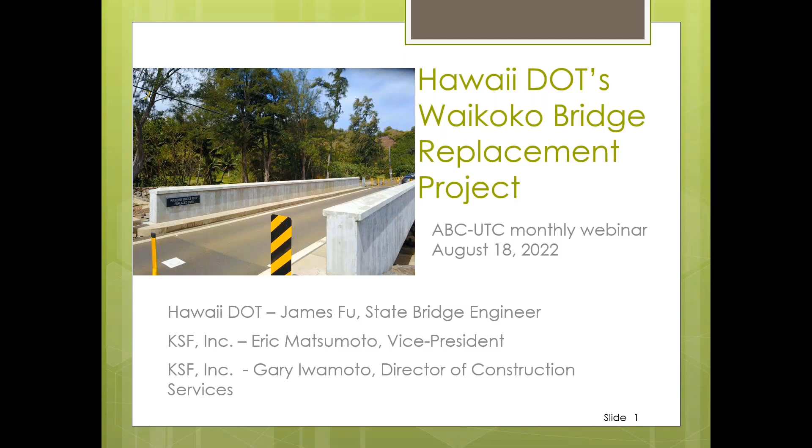Hawaii currently has about 1,360 bridges in the state. The average age of our bridges is nearly 70 years old. Our Bridge Design Office manages many programs, such as the Bridge Seismic Retrofit Program, and the Bridge Load Rating Program, where we must meet a federal mandate to load rate all of our bridges for SHVs by December 31st, 2022. We also manage a bridge crash testing program, where we are crash testing our custom Hawaii bridge rails per MASH 2016. We're also replacing many of our destination sign support structures. One of our main tasks is managing our bridge asset management program, where we must meet transportation asset management goals of 20% good bridges and 2% poor bridges. One of our critical tasks is to address critical bridge findings.

Hawaii has a unique situation compared to other states because our highways wrap around the island like this, usually called a belt road system. In most cases, because of this belt road system, if a highway is closed for some reason, residents must use an alternate route, and most times they need to drive great distances to reach their destination.

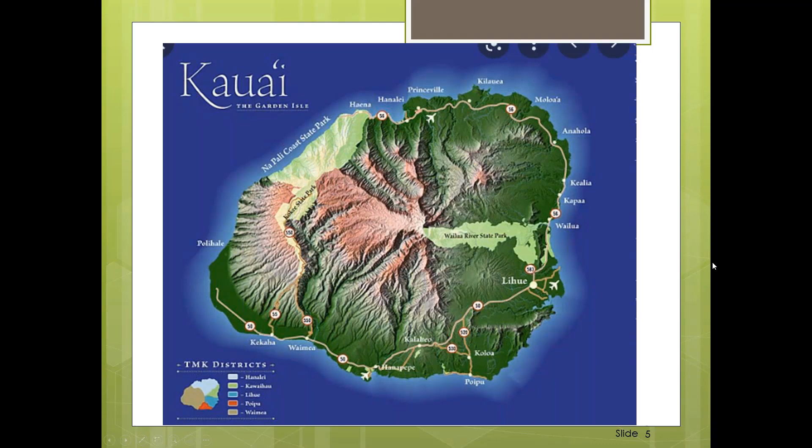Back in April 2018, there was a huge rainstorm on the north shore of Kauai. Heavy rains occurred between April 14th and 16th of 2018, which set a national record of 49.69 inches of rain in a 24-hour period. The previous Hawaii record was 38 inches. These heavy rains created many landslides on the north shore of Kauai, which closed the highway.

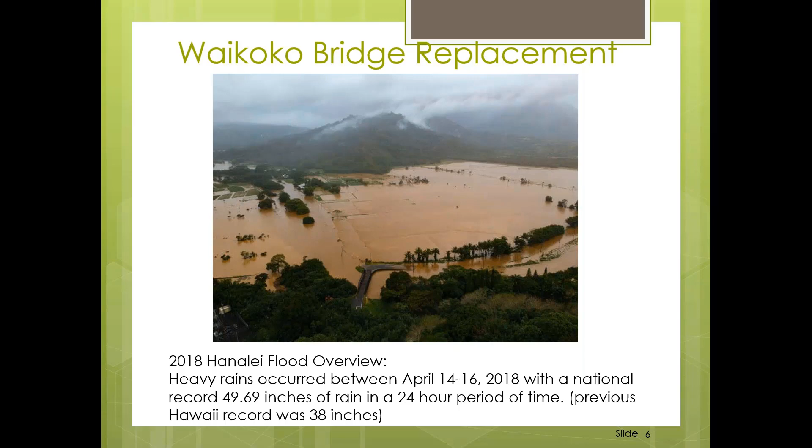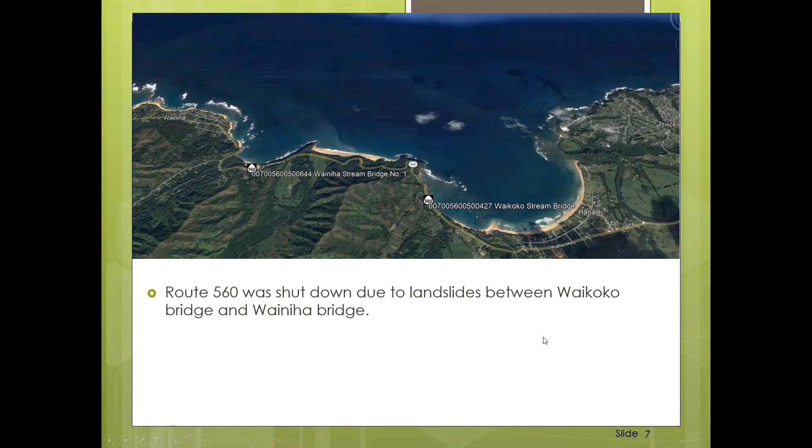Route 560 along here was shut down due to landslides between Waikoko and Wainiha. See Wainiha here.

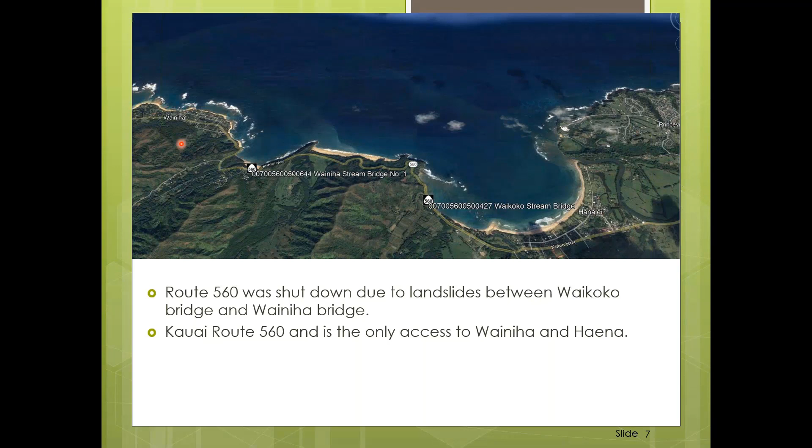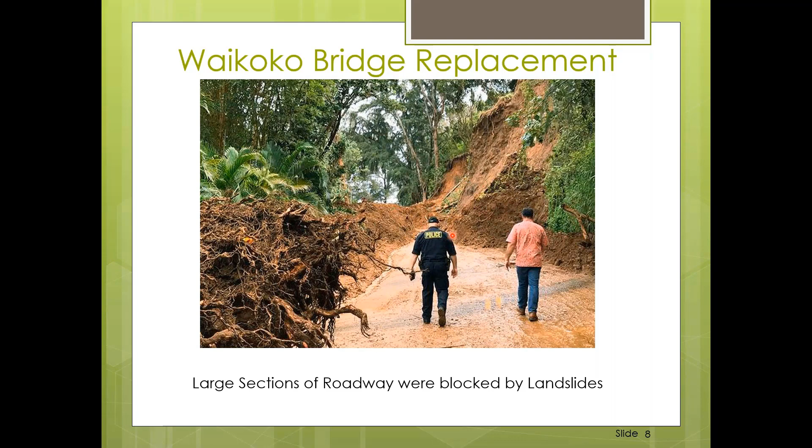As I mentioned before, to get into this area, Route 560 is the only access to Wainiha and Haena. Traffic was slowly opened to one-lane traffic after a few weeks. Large sections of the roadway were blocked by multiple landslides, and large sections of Route 560 were literally washed away.

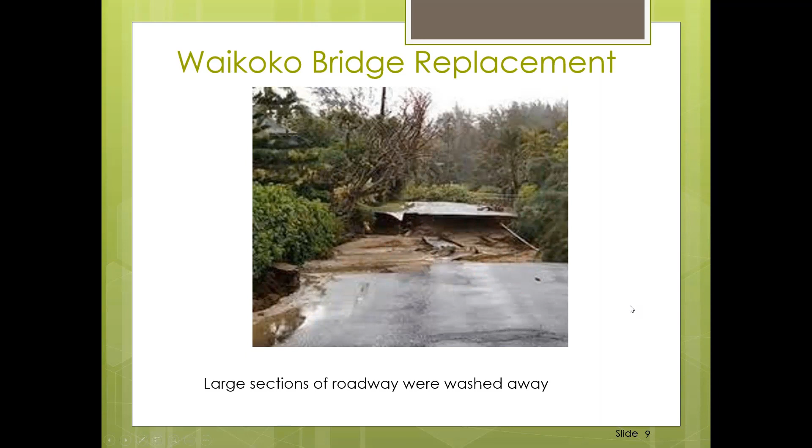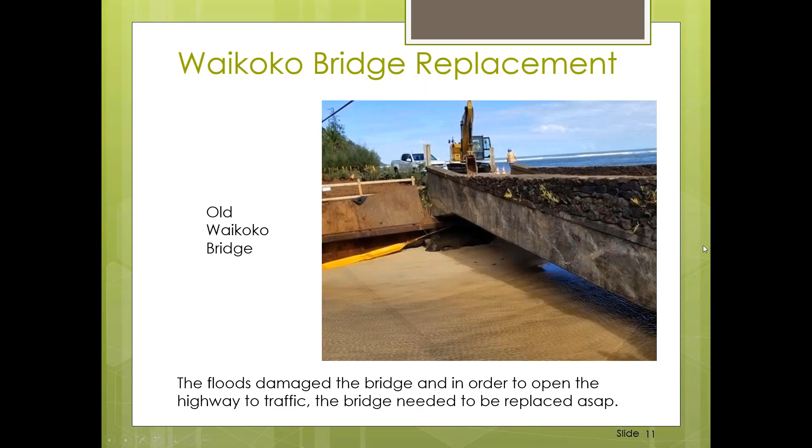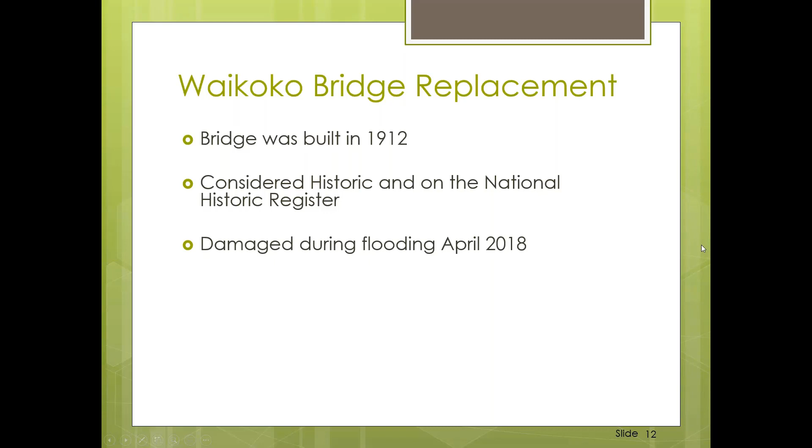The Waikoko Bridge was built in 1912. It is considered historic and on the National Historic Register. It was damaged during the flooding of April 2018. Hawaii DOT decided to replace the bridge after reviewing the option to construct it with a full highway closure for one weekend.

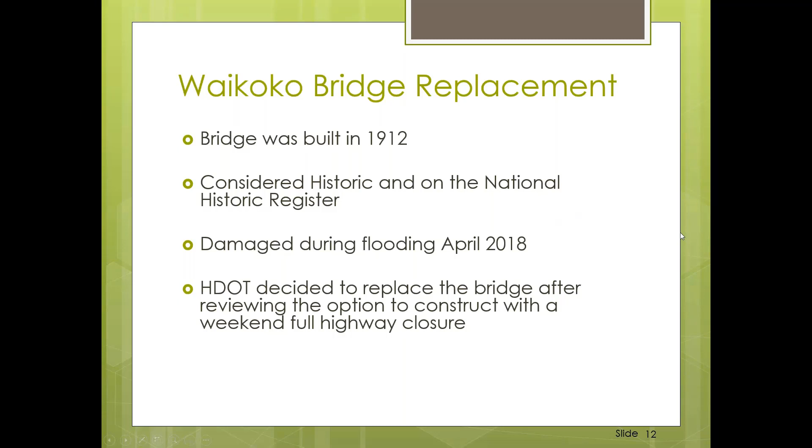The further discussion here, we're going to talk mainly about this 3-day weekend highway closure.

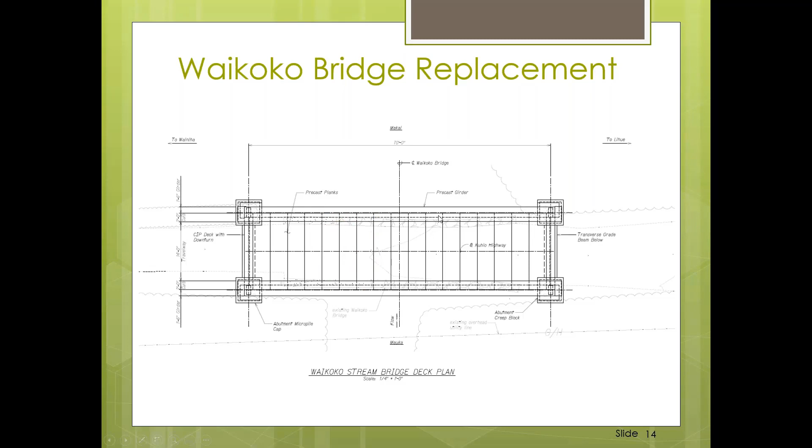After the girders were placed, transverse precast concrete planks, shown here, were placed and supported by the bridge girders.

After the precast planks were placed, a cast-in-place concrete curb was placed to connect the precast planks to the girders.

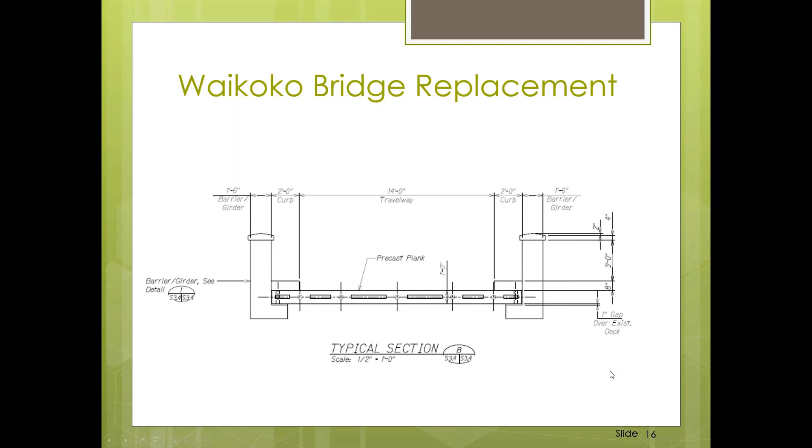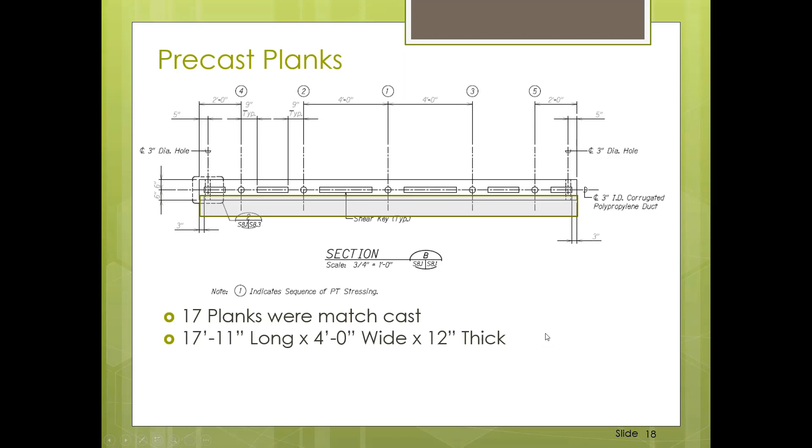There were 17 precast planks, and they were match cast, approximately 18 feet long, 4 feet wide, and about a foot thick. Concrete strength about 6 KSI, and shrinking corrosion inhibitor and shrinkage reducing admixtures were used in the concrete mix.

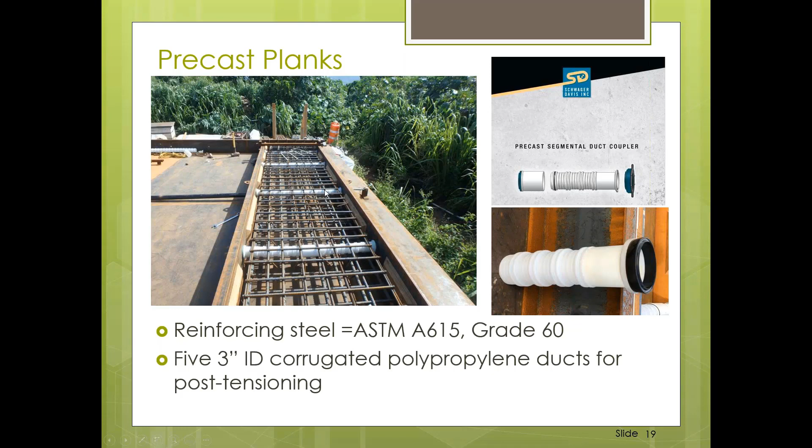The reinforcing steel for the precast planks was grade 60. There were 5 corrugated polypropylene ducts for the post-tensioning. As you can see here, the white tubes are the post-tensioning ducts. At the ends of the plank were precast segmental duct couplers, which were also used to help tie the planks together.

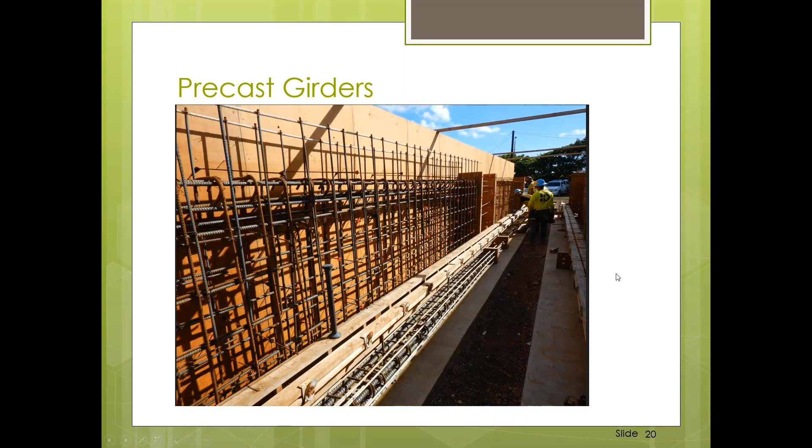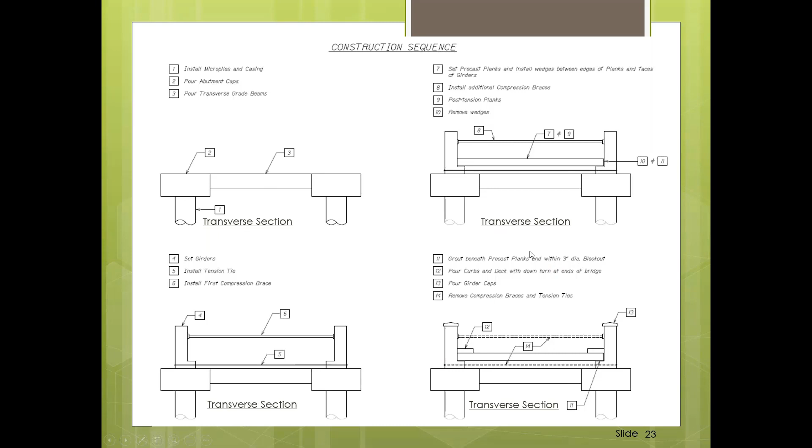I will now go over the construction sequence of the new bridge, and I'll go over all of this in the next few slides, so don't worry about reading this. This is before the weekend closure.

Note that this is a transverse or cross-section look at the bridge. This could be the upstream, this could be the downstream. The bridge girders would run longitudinally, coming at us into and out of the page.

First, micropiles were installed. Then the abutment pile caps were poured. Then the transverse grade beams were installed to connect the two abutment pile caps. As mentioned, this is before the weekend closure.

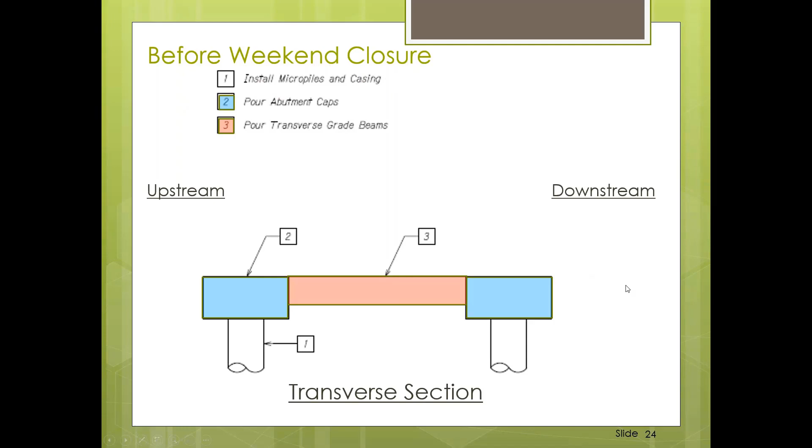As mentioned before, micropiles were installed at the four corners of the bridge. At this corner, you can see that the drill rig was being used to drill for the micropiles at that corner of the bridge.

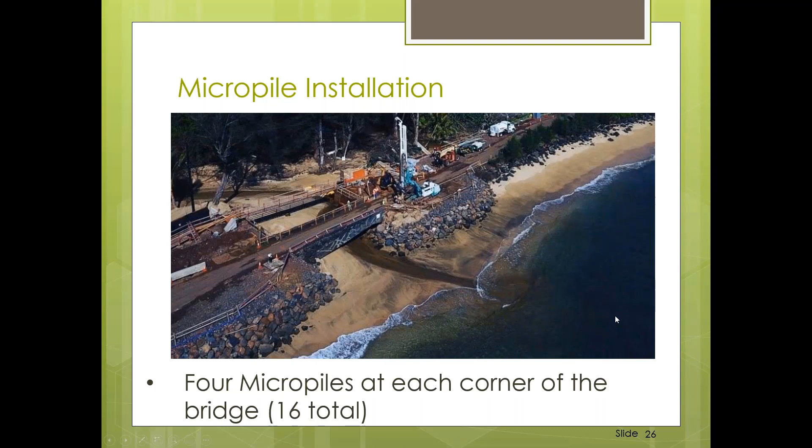Here's a picture of the abutment pile cap. You notice that the existing bridge is right here - see the existing concrete bridge railing here and the stone bridge railing here, this existing bridge.

After this concrete pile cap was poured, the concrete grade beam going this way would be poured to connect the two abutment pile caps. So the micropiles, the pile caps, and the transverse grade beams were installed before the 3-day full highway closure.

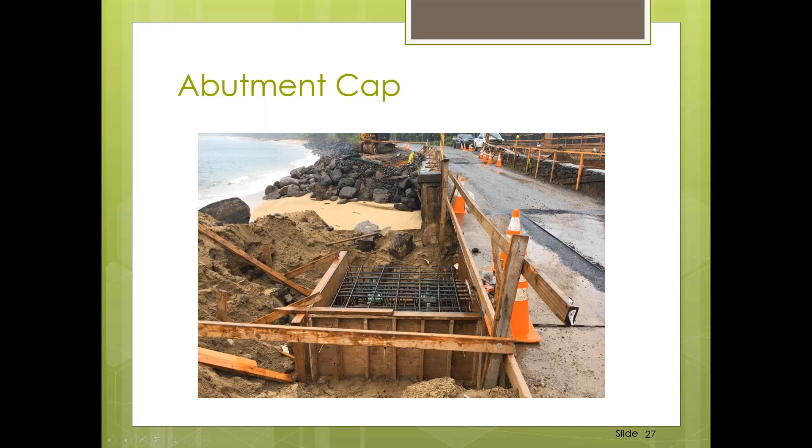During the 3-day weekend closure, the precast girders were placed, the L-shaped girders. Then temporary tension ties were installed near the bottom of the precast girders. Then temporary compression braces were installed near the top of the bridge girders.

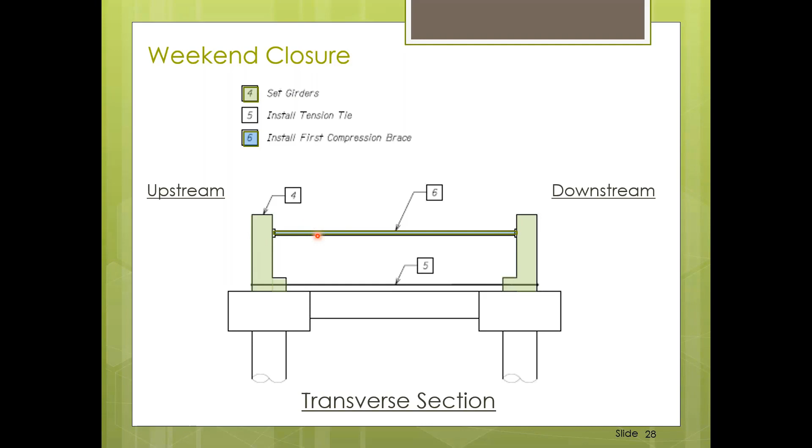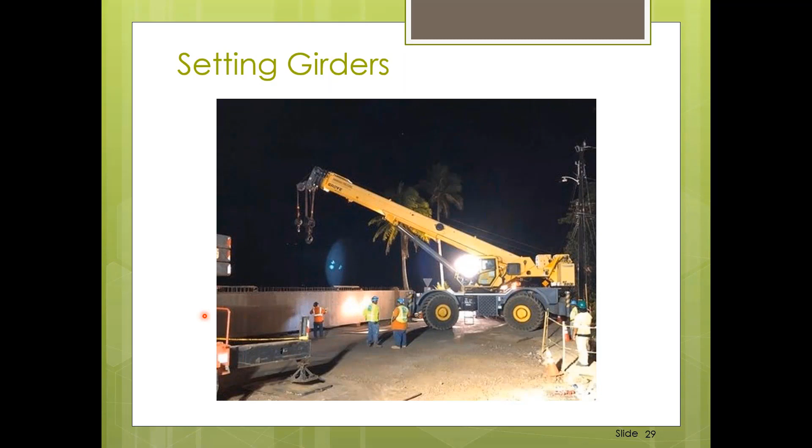Here's a picture of the contractor setting the precast girder, which is right here. Again, here's a picture of the contractor setting the precast girder. Note the L shape of the bridge girder.

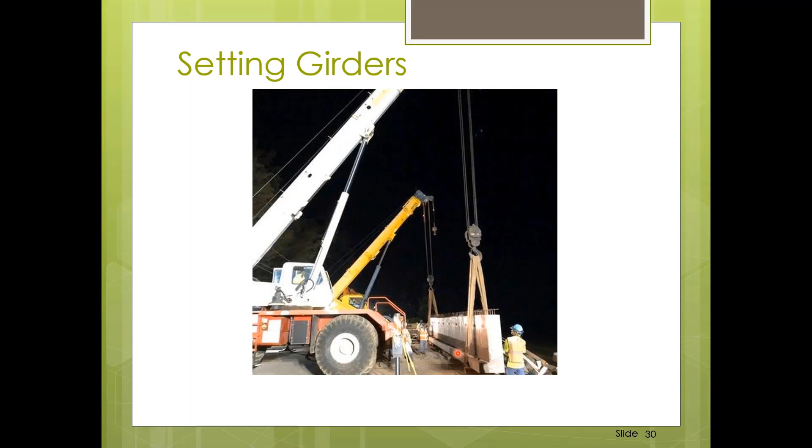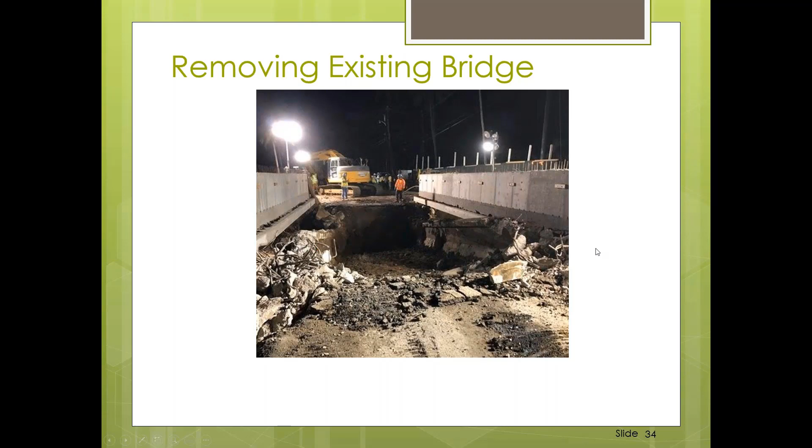This is another picture of the removal of the existing bridge here, and note the bridge railings are here. Here is a picture after the existing bridge was removed, and the girders are already set in place.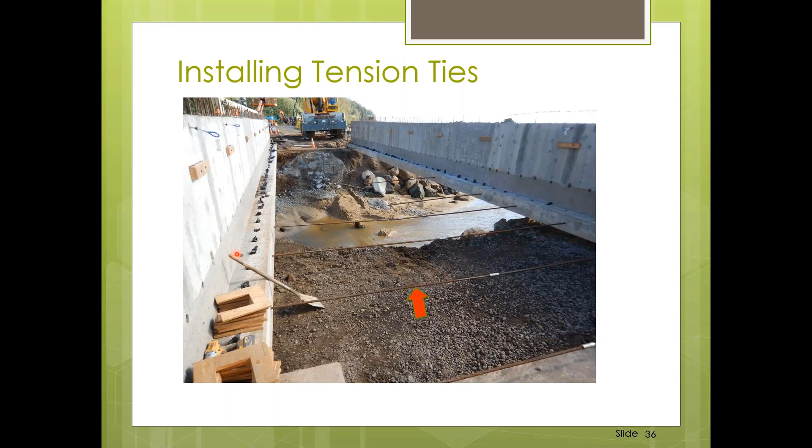Here's a picture showing all the temporary tension ties have been installed here. The tension ties are all installed. Now the first compression strut, this timber compression strut, is placed here against the bridge railings. And here the contractor is setting the first precast plank.

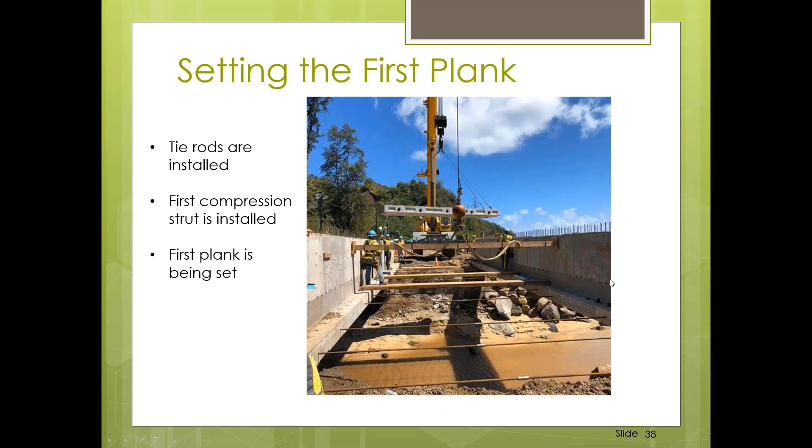After the tension ties were installed, the precast planks were installed. Wedges were installed between the edges of the precast planks and the face of the girders, to ensure intimate contact between the precast planks and the bridge girders. Then additional compression struts were placed.

Then the precast planks were post-tensioned longitudinally, and once they were post-tensioned longitudinally, the wedges were removed.

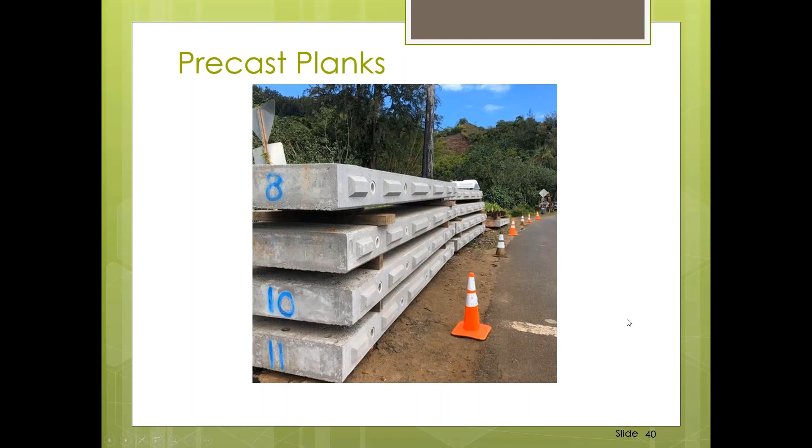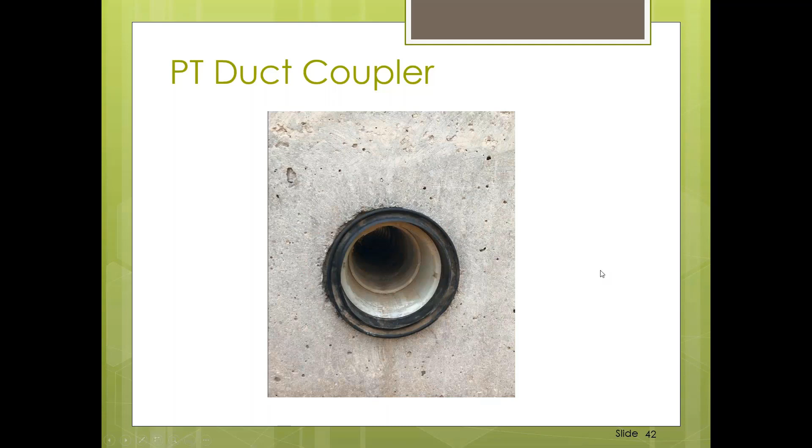Here's a picture from under the planks. Note the tension ties here, and this is the precast plank. Note the post-tension duct couplers here. Although it's hard to see, if you look close enough, you can see that the epoxy is on the coating between the planks.

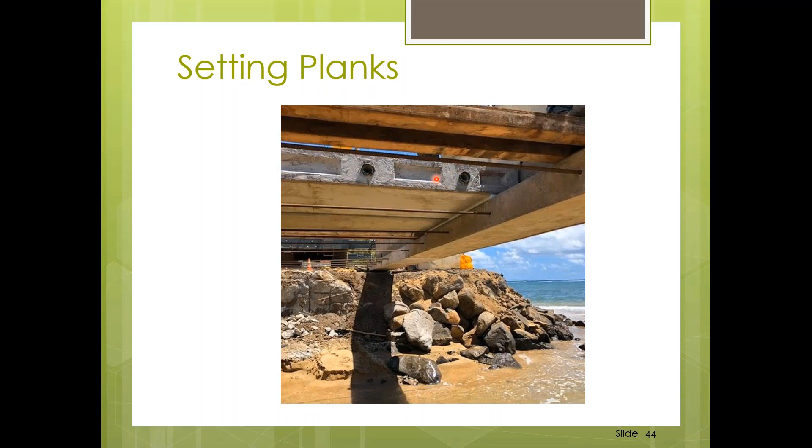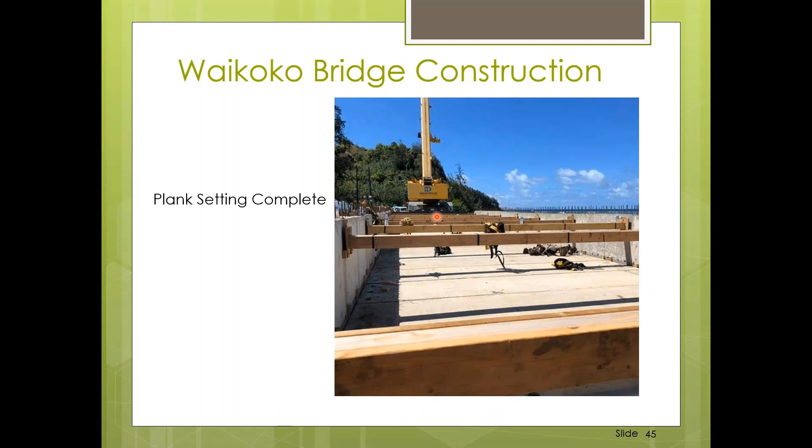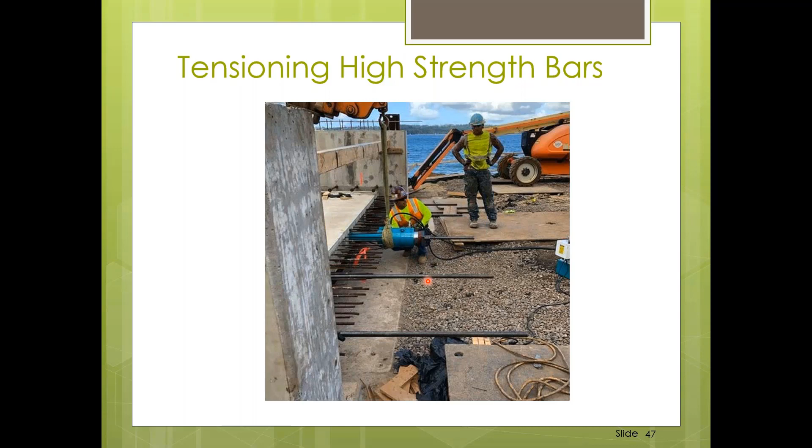After the workers stress the high-strength bars, you can see the epoxy oozing out from the top of the deck. Next, grout was placed beneath the precast planks and within the 3-inch diameter blockout. Next, concrete curbs were installed with downturns at the end of the bridge.

Next, girder caps were installed. And finally, the compression struts and the tension ties were removed.

A critical part of this design was a cast-in-place concrete curb, right here. Why was this critical? Because this concrete curb allowed dowels to be placed, which connected the precast planks to the bridge girder - this is your L-shaped girder. After the concrete cured, this allowed the temporary compression struts and tension ties to be removed.

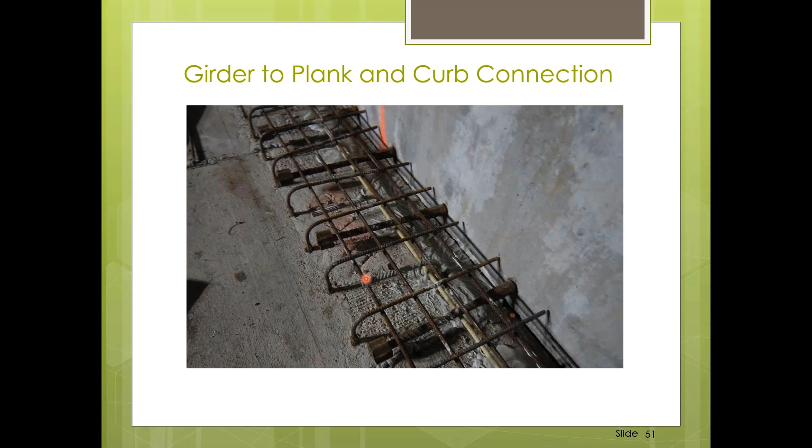Here's a picture of all those dowels in the concrete curb. Here's a picture of the workers placing concrete for the concrete curb.

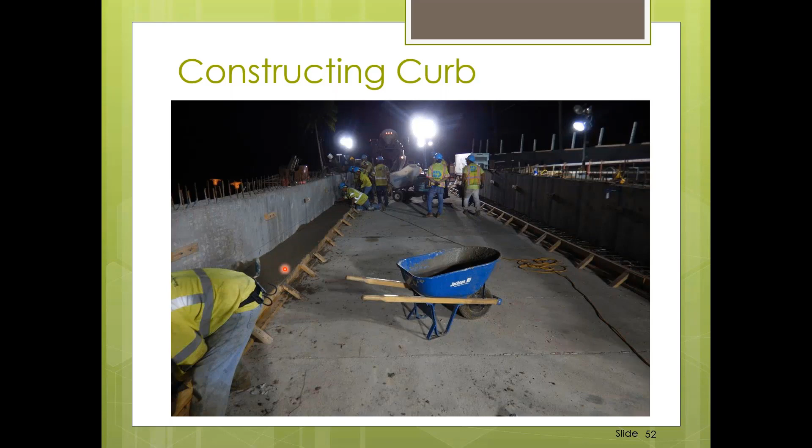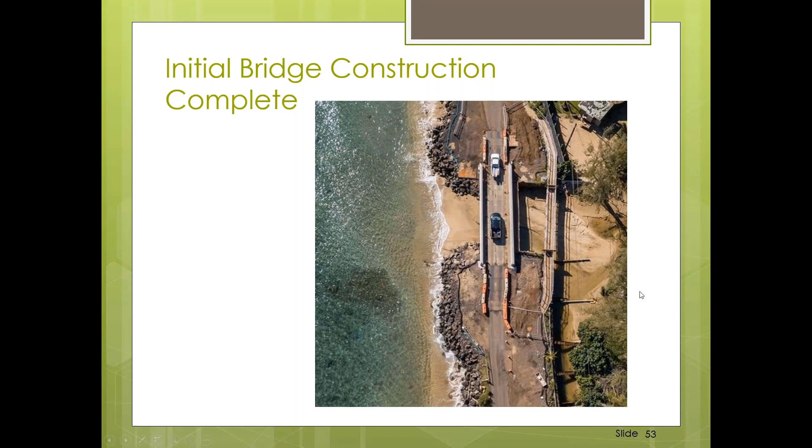So after the cast-in-place curb was installed and the temporary compression struts and tension ties were removed, the bridge was ready to be open for traffic. The Waikoko Bridge was open to traffic on June 16, 2019.

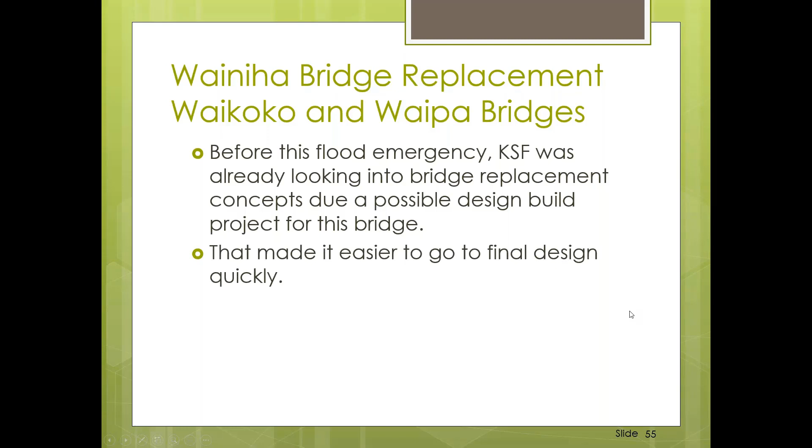Also, the state of Hawaii issued a state emergency procurement for this project, and the contractor and we had resources to do the work, and we could proceed as soon as plans were available and material was procured.

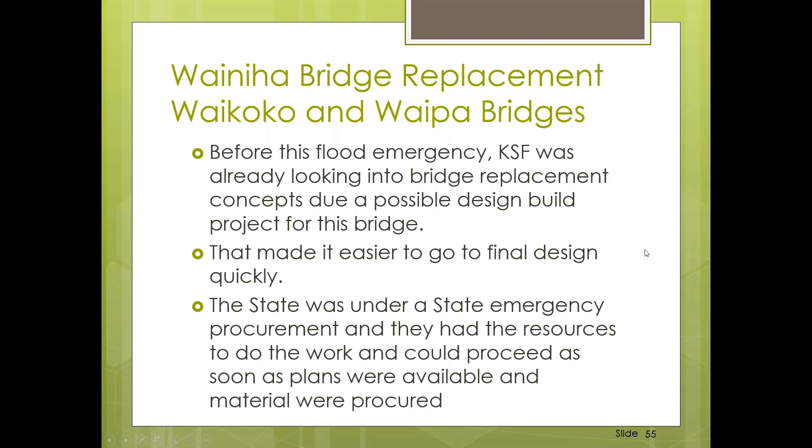We're now going to show a short, about 2 minutes long, time-lapse photography of the 3-day weekend closure. Gary Iwamoto, Director of Construction Services of KSF, will jump in and show you what happened.

Starting at 8 o'clock on Friday night, they started setting the girders, and then started excavating out the old bridge. Once that was complete, they moved in to start setting the planks.

That continued until all the planks were set. And once the planks were all set, the post-tensioning operation took place and the grouting of the ducts.

And then the curb work and the railing cap work was done, and basically that completed the primary work on the bridge.

Once that was complete, the work on the ramps, the temporary ramps, and the end post protection devices were installed, to get ready for the bridge opening once everything was cured out.

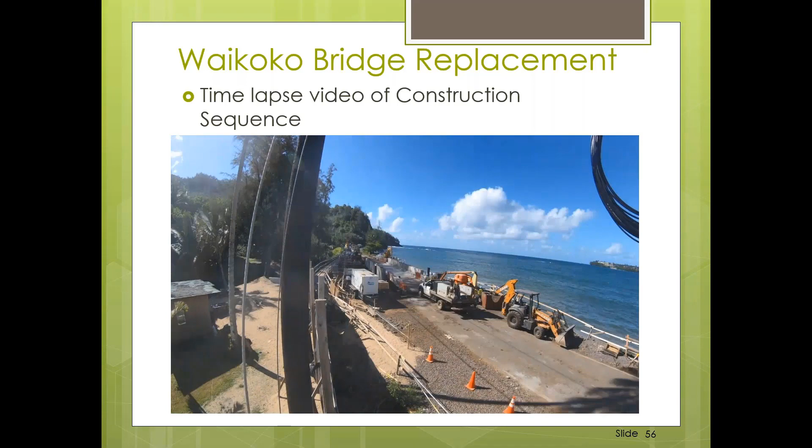So this entire process took about 56 hours from Friday at 8 p.m. to Monday morning at 4 a.m.

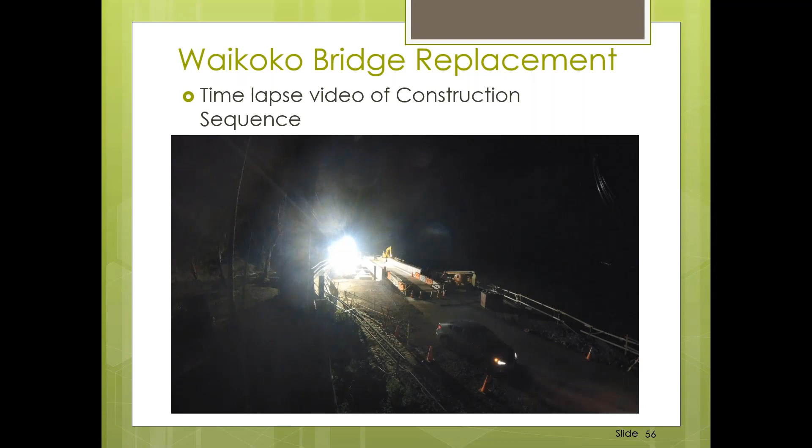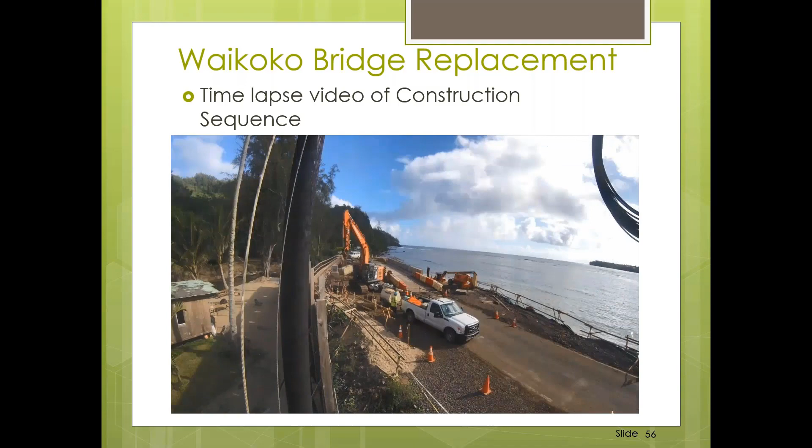Once everything was cured and cleaned up, at about 4 a.m. in the morning, traffic was allowed to cross the bridge, and then work continued to restore the entire site and to install a permanent roadway and relocate all the utilities that were previously relocated to allow this work to continue.

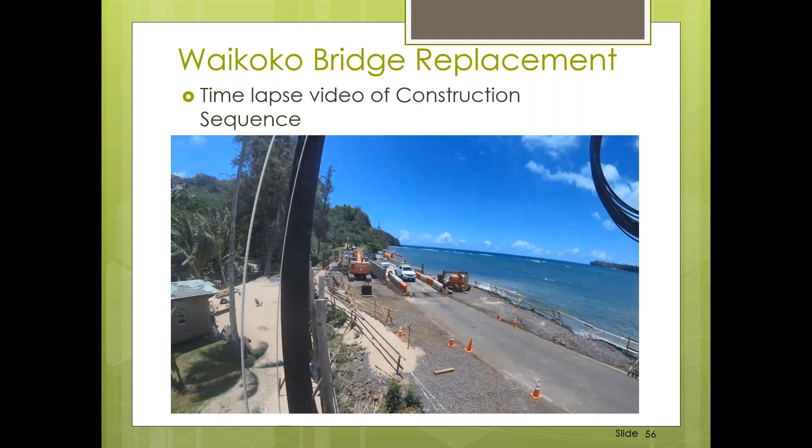Okay, that basically wraps up our presentation. And if there are any questions...

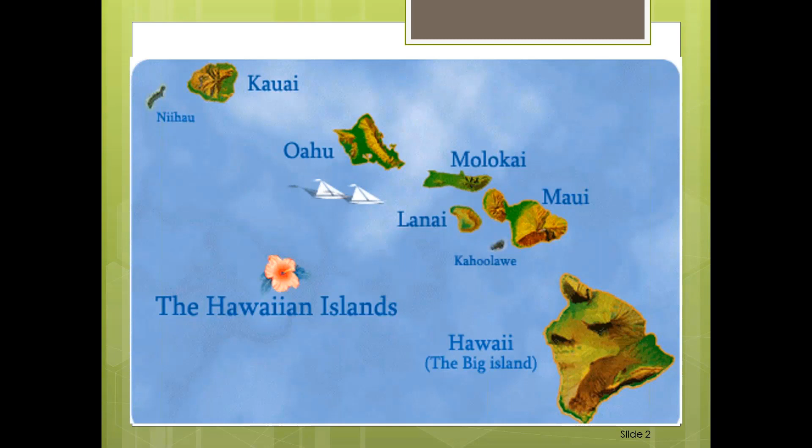And that was the questions - if the girders are structural stringers, are they serving as traffic barriers? And that's what they are also. Let's go on and look at some other questions. Here's one: on slide 22, why was such a large closure pour used for the girders? Well, for one thing, the girders, we have it coming in three pieces.

The casting yard was about 40 minutes away, so there were limitations on transportation of these girders to the site, and the girder lengths or sizes were dictated by those limitations. For this closure pour, we located all of the splices and couplers for the contractor so he could pour it without too much congestion. The splices were 4-foot splices, just based on those factors.

Now, did you use the 6,000 psi concrete in the closure pour? Yes, we had 6,000 psi concrete with corrosion inhibitor and SRA.

After the girder pieces were transported to the site, close to the bridge, it was spliced, not spliced in place but close to the bridge in close proximity. Once it was closed, it was ready to be picked and placed into position along the existing structure.

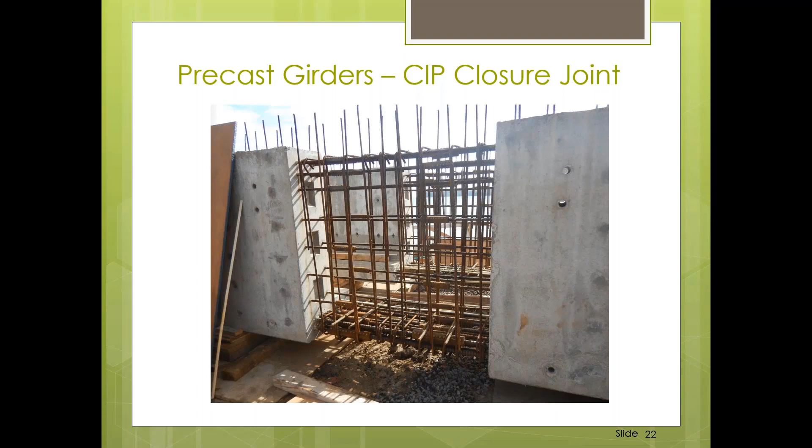We had a question: was the casting facility, since you're talking about the closure pour casting the beams, an existing facility or was it created specifically for the project? It was created specially for the project, and the site was selected because it was readily available for the contractor.

We had a question about the tension ties during the presentation: were they part of the permanent structure, and if so, were they galvanized or stainless steel? If this is pertaining to the rods placed on the bottom, those were temporary ties.

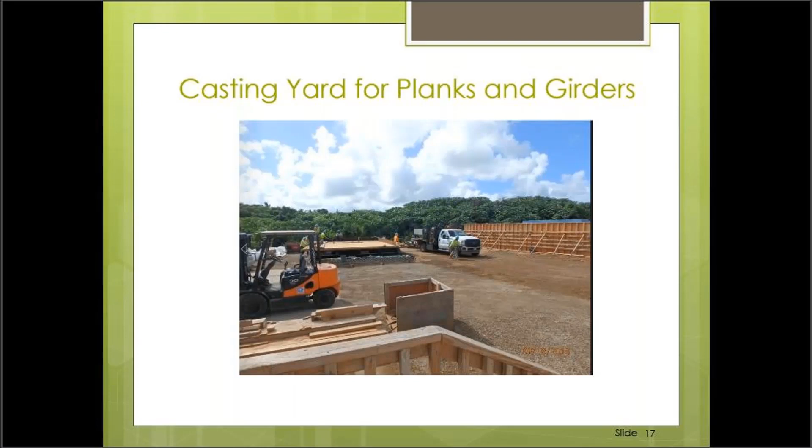For the girder, it's an L shape. When we're placing the planks, there's an eccentric load, so the girder wants to turn in towards the roadway. That's why we had the compression struts at the top and the tension ties at the bottom of that ledge - if it wants to turn this way, the couple would help resist it.

Okay, but those were temporary, you said. Temporary, yes. The next question, which came in before your presentation: was corrosion resistant rebar considered or used in the project?

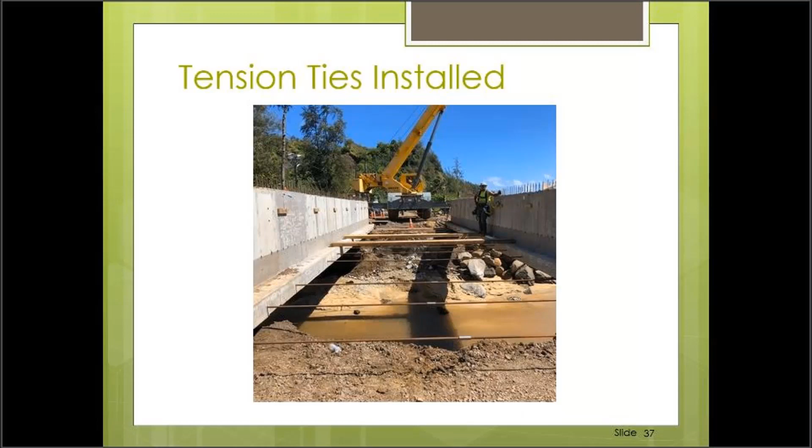It looked like regular black bar - I think y'all mentioned that earlier. It is regular black bar. We actually wanted to use the A1035, otherwise known as the ChromX, with 9% chromium. However, we couldn't get it in time, so we proceeded with the black bar.

For the dowel coming out of the ledge of the girder into the plank, that is the 2205 duplex stainless. To address corrosion, we have the Cortec corrosion inhibitor in all of our concrete, and we also have a low water cement ratio - we specified 0.4 water cement ratio max, though it did come in lower than that.

Were there any other provisions incorporated to address corrosion? You mentioned some corrosion inhibitors. Yes, we did use the Cortec MCI in our concrete. We also included it in the grout for the post tensioning that surrounds the post tensioning rod within the duct.

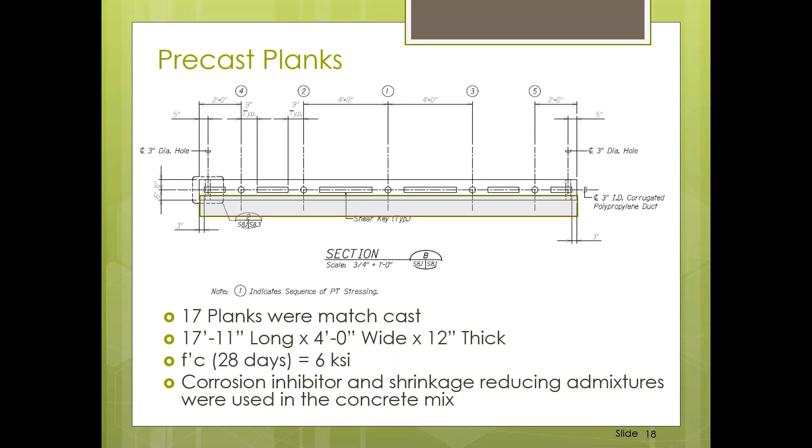The final question in the design section: is Hawaii DOT considering more ABC projects given the small outdated bridges on the islands? They mentioned Haleiwa - we're looking at a slide-in bridge happening in another couple months, and more ABC type bridges to replace existing ones, because the state DOT wants to minimize or eliminate temporary bypass roads, since it's difficult to encumber right of way for temporary bridges. So we're looking more and more at weekend type closures to install new bridges, and we'll be doing one in a couple months, which is a slide-in.

Okay, let's look at some construction questions. We've got a bunch more that have come in since we started the Q&A, so we'll try to move along.

What was the biggest engineering challenge the contractor had to overcome that wasn't designed by the engineer of record? I think most of the engineering challenges were designed into the project with lighter sections or pieces to be put together on site, handled with equipment we could strip down and get over the existing bridges, since there's a 15-ton weight limit for most of the bridges coming in. But the biggest challenge really was dealing with heavy pieces of precast in a very short period of time that we had.

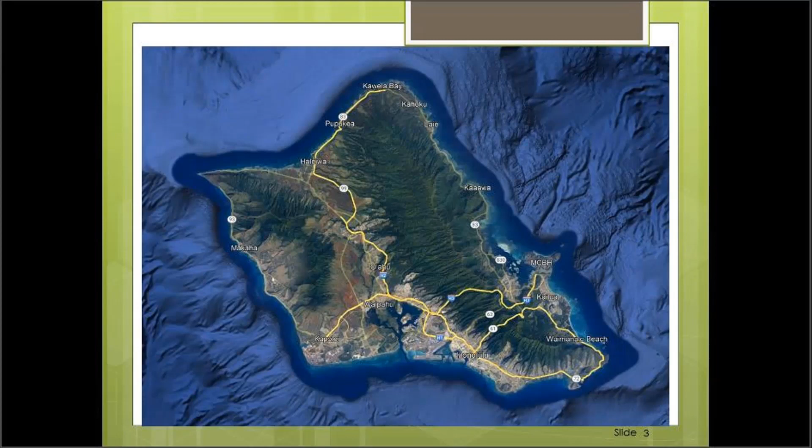There was another question along that line: do you know what the setting time of the epoxy was between the planks? We had 8 hours from the time we applied it to post-tensioning, and it was well within that period.

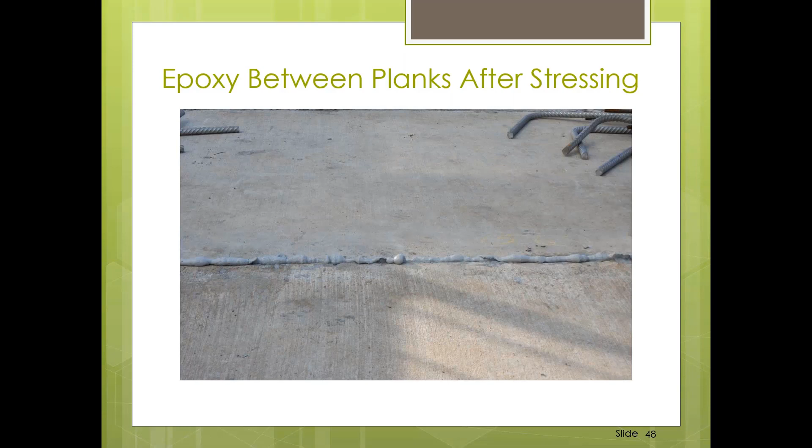I got a question here about the tension ties, that was the one about the permanent structure. Let's go to a cost question: what were the temporary bypass costs and benefit for the project? I don't think you really ran a temporary bypass, did you? Didn't you run traffic over the existing bridge? We did not.

There was a CFL project that was going to put in a temporary bypass road. That bypass was estimated at between 10 and 15 million to go upstream of the existing bridge. That work wasn't done, but it was quite involved because of issues related to drainage coming in on both sides of that upstream area, from both the left and right side. This bridge itself ended up costing somewhere in the neighborhood of about 3 million, so that temporary bypass was eliminated. For the cost of this weekend closure and some inconveniences that occurred that one weekend, the state was very pleased with the cost that was spent.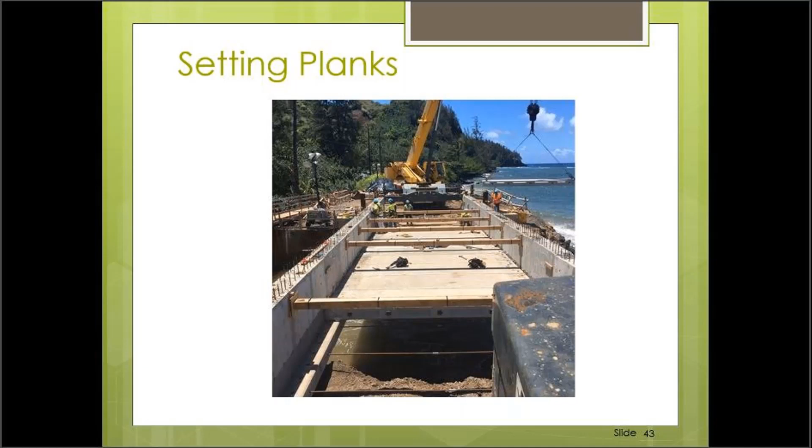Next question: what was the setting time of the epoxy between the panels? We had an 8-hour window.

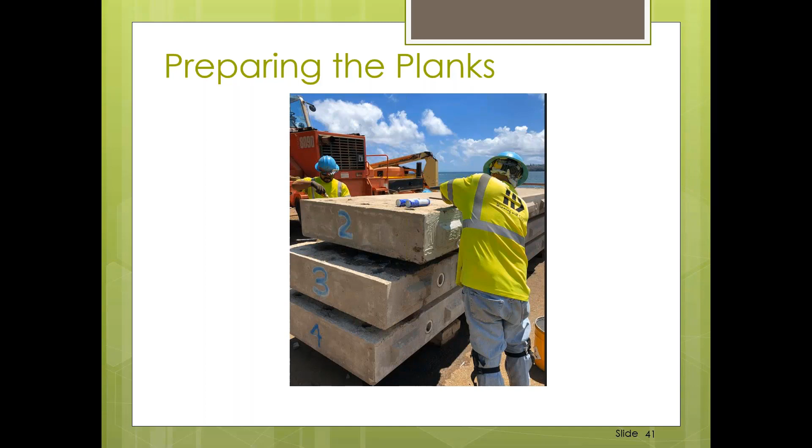Was there a specific type of high early strength concrete used for the curbs? The high early grout was used between the plank and girder, and beneath the plank and the ledge, but not for the curb. However, the curb concrete did have corrosion inhibitor and shrinkage reducing admixture, and was also 6,000 psi.

What is the ADT on the bridge? I'm going to check that. A couple years ago it was 3,300, but looking this morning it showed 8,000. I've got to check into that, I can't see it increasing that much. I'm thinking it's more somewhere around 3,000.

Just a follow-up question on the epoxy, did you use normal or slow set epoxy? Slow set. Next question: what were the design considerations for the tension ties and compression struts, and how does the cast-in-place curb function to replace them?

Looking at the entire construction sequence, the initial phase is setting the girders and then placing the planks. When we place the planks, they want to turn inward toward the roadway, so the temporary compression strut on top and the tension tie on the bottom help resist this overturning with the couple formed by the compression strut and tension tie.

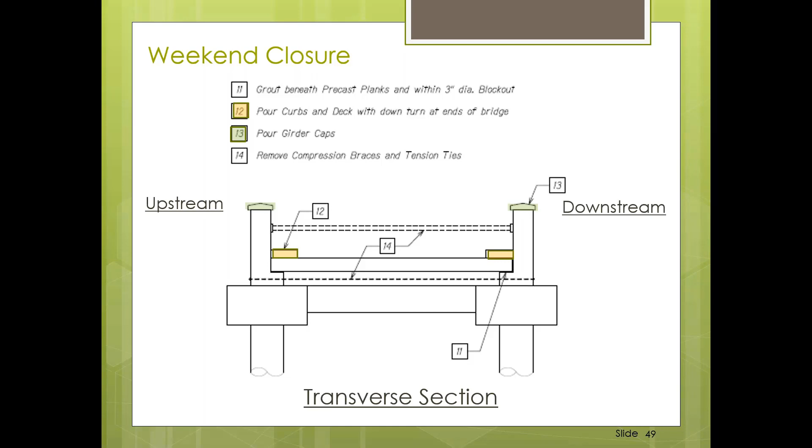Looking at the juncture between the plank or curb and ledge, there's a stainless steel dowel that goes from the ledge into the plank. It also extends into the curb, providing resistance at the bottom. The curb and top of the plank also provide resistance, replacing the compression strut or the wood that goes across the top.

How long did the whole bridge replacement take, and what were the lessons learned? The entire time it took was about 56 hours to complete the weekend closure.

I guess part of the lessons learned was that it could be done in a shorter period of time, although that would not allow for any kind of hiccup in the process. It can be completed in a shorter period, but I think the window that we asked for and was provided gave ample time for any issues or problems that would arise.

This road was closed to traffic, and you have residents and emergency vehicles that need access on both sides, which is why the pedestrian bridge was put in. But if you plan on opening earlier and don't finish, that's going to cause quite an issue for everyone, and nobody's going to be happy if they have to sit there and wait.

Next question, were the PT ducts grouted? Yes, they were.

What is the material infill for the micropile casings? We did have micropile grout in there. The 28-day compression strength was 4,000 psi, with a maximum water cement ratio of 0.36.

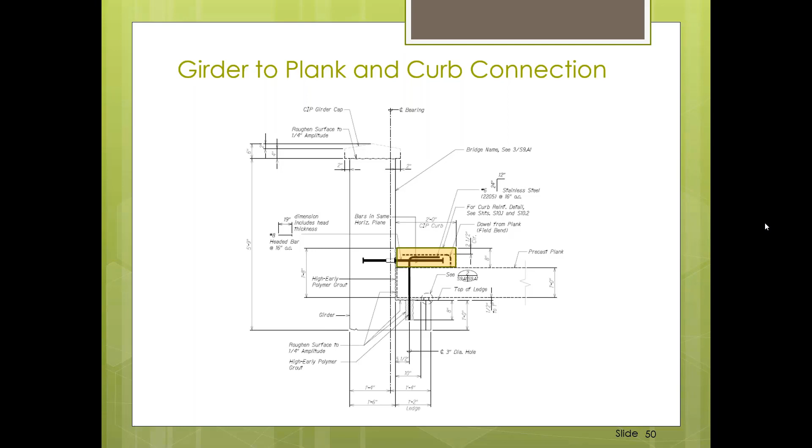Can you provide more information about micropiles and scour measures, as there were no end bents built? So there are rocks placed around the abutments. However, in case those are removed, there's also an additional measure with our steel casing that goes around the micropiles, so the bottom of the steel casing is below any anticipated scour depths.

Next question: what vehicular collision load was used in the design of girders, and how was the load transfer accounted for in transverse beam connections? So we designed the girders for TL1 vehicular impact loading.

If we go back to that slide with the curb, you'll notice there's a number 8 bar that connects the girder to the curb, and the curb is connected to the plank. So it transfers any hit load—the load goes into the girder, which transfers into the curb and into the plank, which then goes into the creep blocks and into the foundation. James had a slide showing these L-shaped creep blocks at the four corners of the bridge.

Next question: why was this kind of bridge selected as the replacement structure versus box beam or some other type? Basically because we wanted to get the largest opening possible to allow for any kind of storm flow, and this allowed the greatest freeboard.

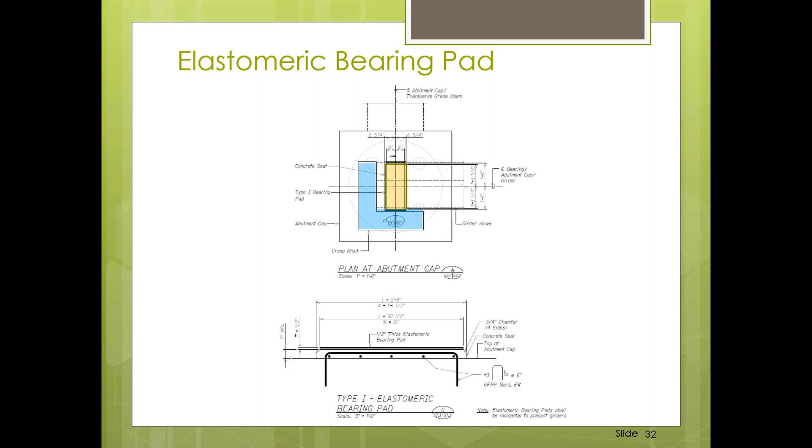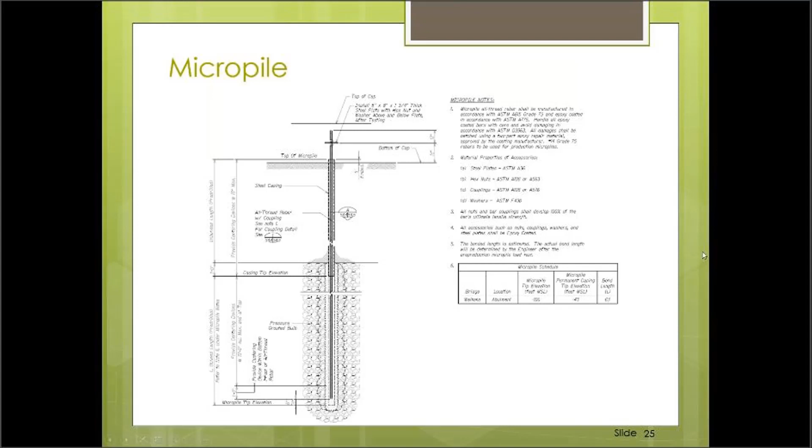Next question: did you have any issues with the use of micropiles, or were they just selected due to ease of installation? It was chosen because that was almost the biggest size rig we could get into the area to do the work—a drill shaft rig or a pile driving rig. The weights on those machines were prohibitive and could not get into the site.

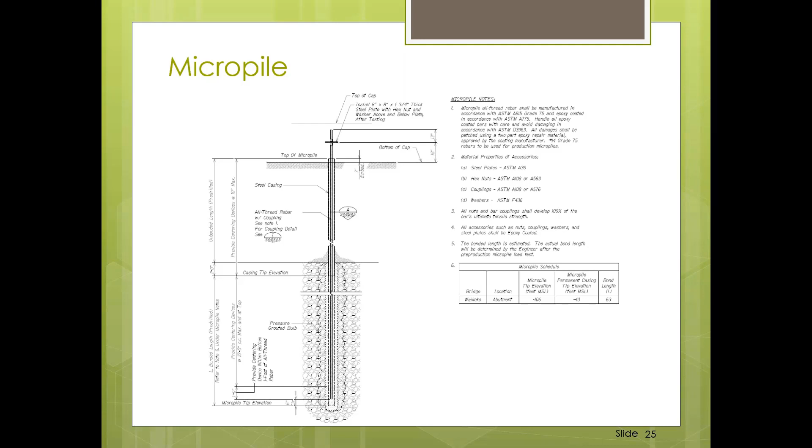Next question: weren't the wedges an actual impediment to fully filling with concrete the gap between the plank and the girders? The wedges were removed at that point, so that the grout could be easily placed.

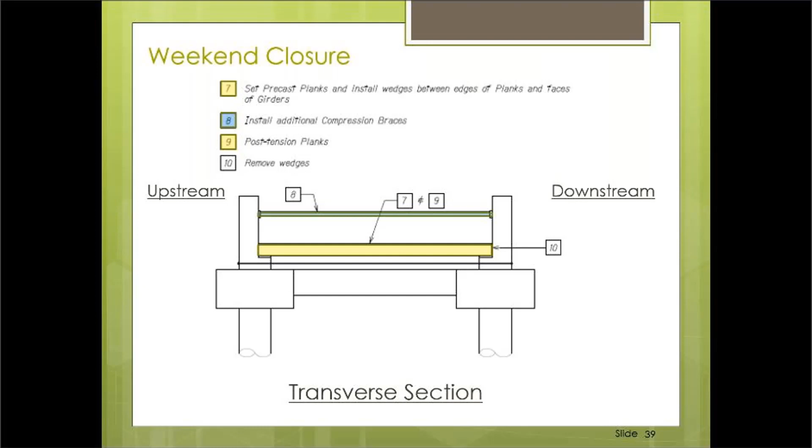Next question: were there any big trucks expected to pass this bridge? After the bridge was completed, some larger vehicles were allowed to pass on a limited basis—tandems at the largest size, regular highway tandems.

All right, I think I'm at the end of my time. There may be a couple of outstanding questions which we will answer on the website. So with that, I thank you for the questions and I turn it back to Mary Lou.